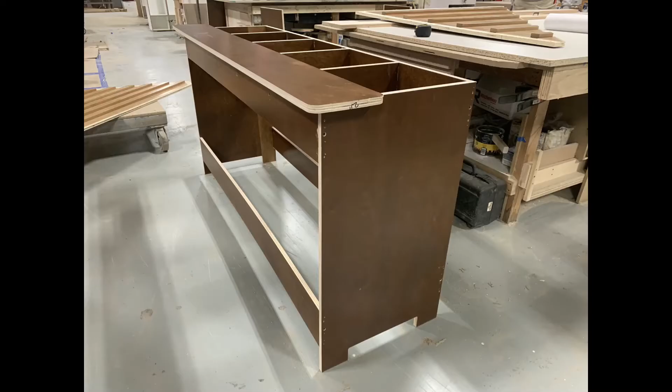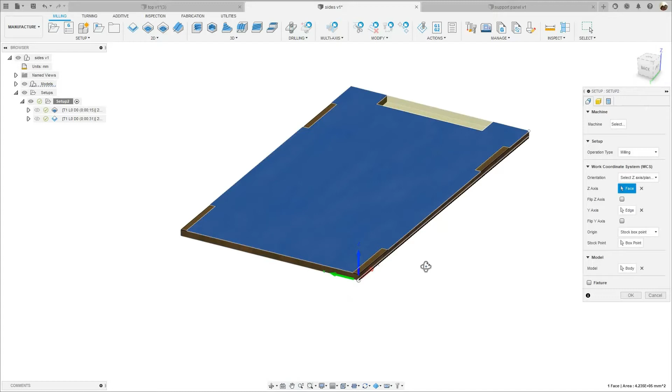Okay, I'm gonna start with the side panel part, which is the first one that I was machining that you saw in the beginning of the video. Okay, so I'm gonna show you my setup. I'm gonna right click, edit, and my WCS is gonna be right here in the back. If you have a different CNC machine, yours is going to be somewhere else, okay?

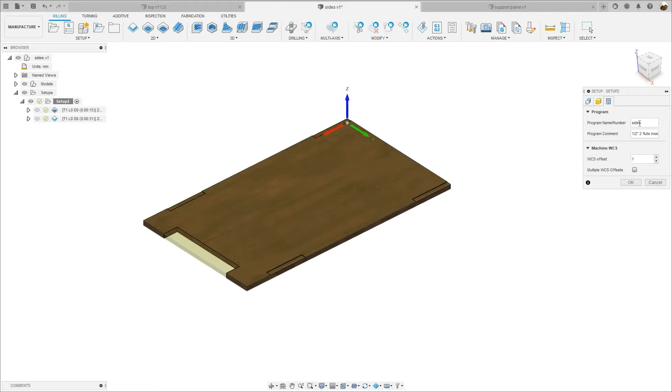And under stock, I didn't add any material. Under post-process, the program name is sides. Program comment, it says 1/2 inch 2-flute insert tool, okay? Now I'm going to click OK. And the first operation is the 2D pocket. I'm going to right click, edit, and I have the tool selected, which is a 1/2 inch 2-flute flat end mill.

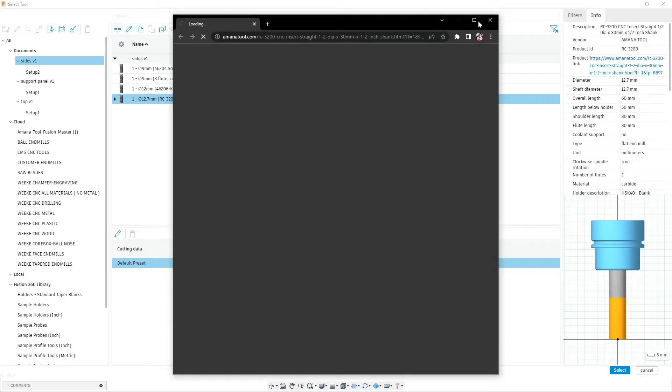I'm going to show you how it looks like. It's right here. I'm going to click on the link. It's going to take me to the Amana website. Okay. This guy right here. That's the tool. All right. I'm going to go back to Fusion 360. I'm going to click on cancel.

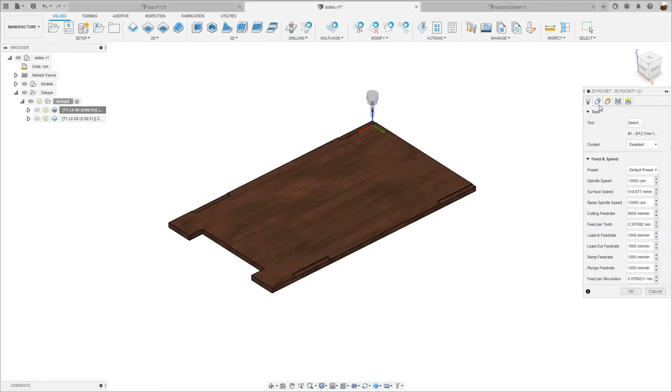And I have the feed and speed all set up. You have the spindle speed at 13,000 RPM, cutting feed rate 8 meters per minute. Okay. Under geometry, I got all 4 pockets or chains selected. All right. And my extension mode is set to tangent. All right. Under height tab, I didn't make any changes here.

The next tab is the passes tab, and I have preserve order checked, both ways checked, and maximum step over I have 10.7 millimeters. I have an expression here, so I'm gonna right click and go down to edit expression, and this is what I have. I have tool diameter minus 2 millimeters. Okay, and you can save that as a default. Okay, so right click, save as user default. Okay.

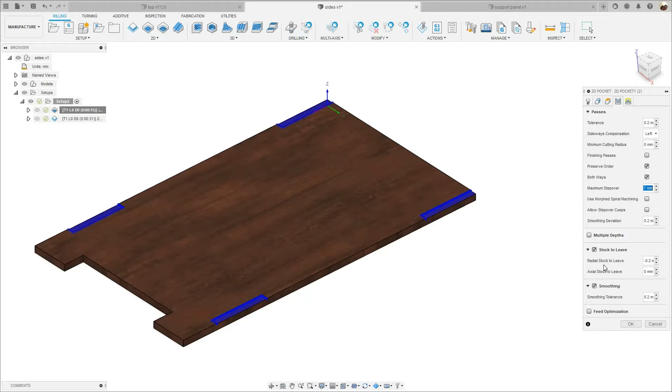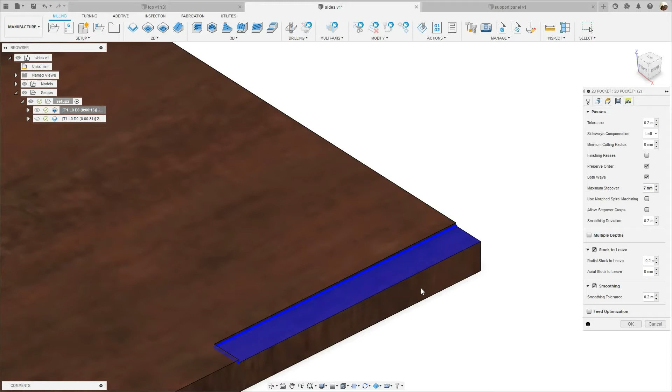Where it says stock to leave is checked, and I have right here where it says radial stock to leave is set to minus 0.2 millimeters, which means when you have a negative value, it's gonna remove more material. Okay, we're just making this pocket just a little wider, so when the guys put the support panel right here, it's flush with this edge right here. The face of the support panel is gonna be flush with this face of the side panel. Okay.

The next tab is the linking tab, and you can see my lead in, my lead out. Okay, horizontal lead-in radius is 2 millimeters. Linear lead-in distance is 25 millimeters. Okay, I got a vertical lead-in radius of 2 millimeters. All right, lead out is the same as the lead in, and the ramp type is plunge. Okay, I'm gonna click OK now,

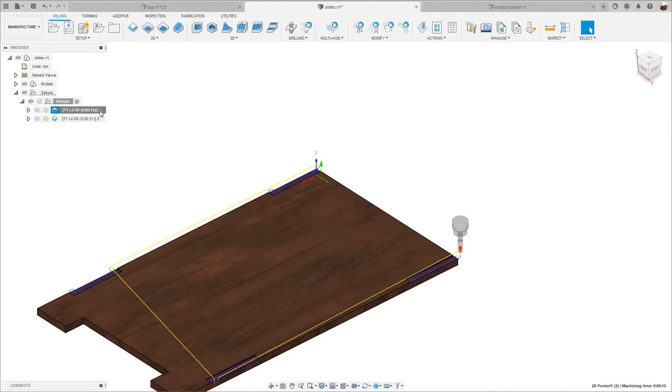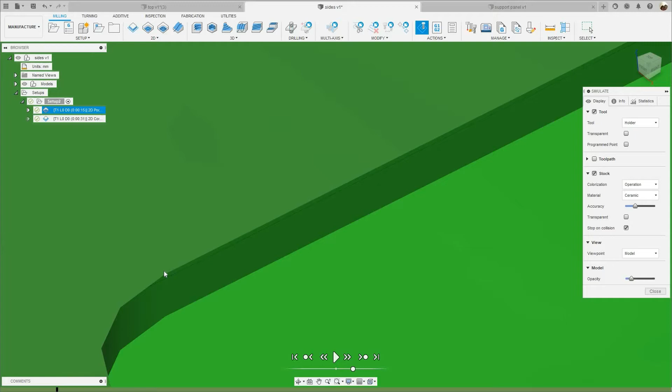and I'm gonna simulate this toolpath. Right click, simulate. See, I'm keeping the tool down. It's not retracting. And I'm gonna stop right there. I'm gonna zoom in. I'm gonna show you. See how it's removing the 0.2 millimeters of material. Okay. I'm gonna zoom in a little bit more. See it? Okay. So if you want to remove more material, you just gotta type a negative value. Okay.

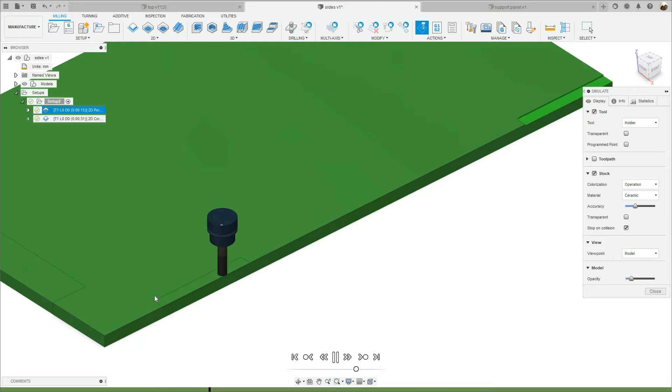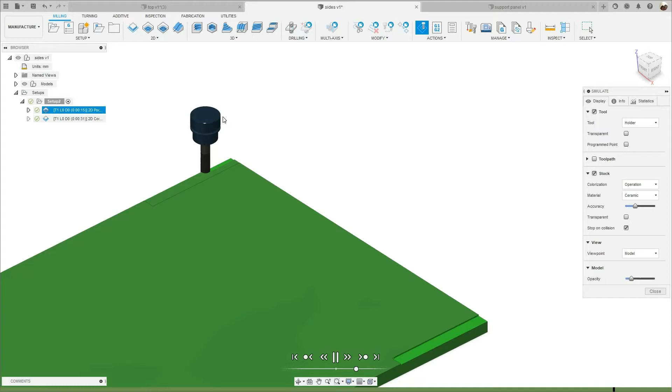It's come down here. It's gonna retract. It's gonna go to the other side of the panel and start machining this pocket. It's gonna retract and machine the last pocket. Okay. Okay, so that's the simulation of the 2D pocket.

And the last one is a 2D contour. Right click edit. And I'm using the same tool. I didn't want to use a different tool because the machine doesn't have a tool changer. But if your machine has a tool changer, you can use a different end mill if you want. Okay, it doesn't really matter. Okay, same feed rate, same speed as the 2D pocket.

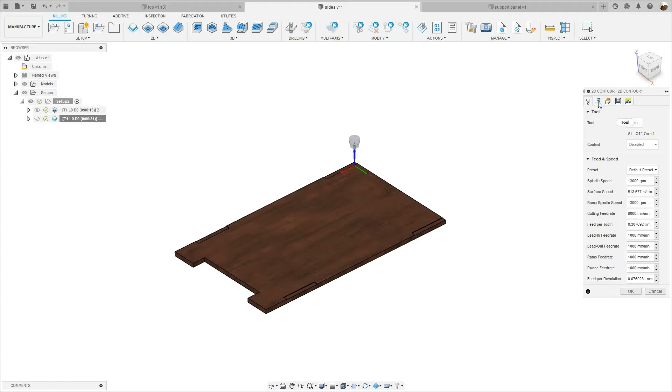Under geometry, this is what I have selected. Okay, under contour selection, I got 3 contours. All right, and side is set to start outside. Okay, under height tab, I'm gonna go down to where it says bottom height, and where it says offset, I have a negative value. That means the tool is gonna go lower. It's gonna go past the bottom face of the panel, 3 millimeters.

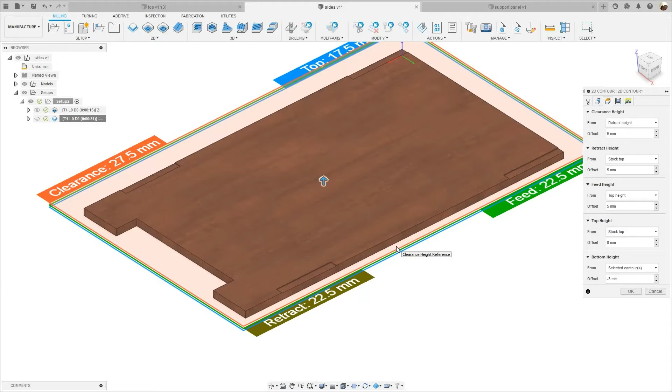Okay, that's what's gonna happen. You can increase this if you want. It depends. Let's say the panel is not really flat, and you don't have anything right here supporting this area. So this area right here is just going to be hanging.

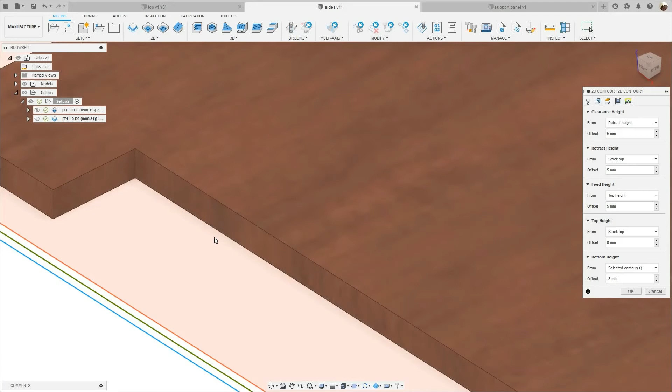So sometimes when you start cutting through the material, it doesn't cut all the way through. It leaves like an onion skin right here. So you got to increase the offset on the bottom height. Just increase it, okay? I usually use just -1 millimeter, but this time I had to increase it because my vacuum pads were somewhere over here, okay, right here. I didn't have any vacuum pads where the notch is because the vacuum pad is going to get cut, all right.

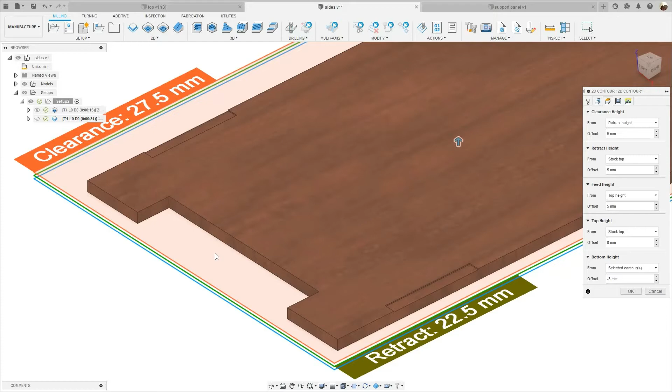On the passes tab, I'm going to go down to where it says multiple depths, and that's checked. And maximum step down is 5 millimeters, okay. The finishing step down is the same. Let's scroll down, and I have use even step downs checked, okay. The next tab is the linking tab, and I have a lead in and lead out of 25 millimeters right here where it says linear lead-in distance, okay.

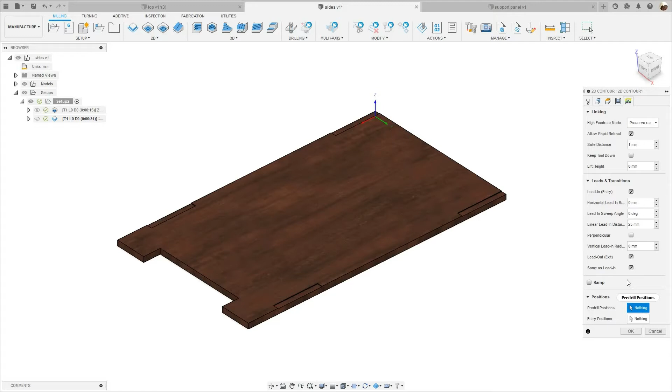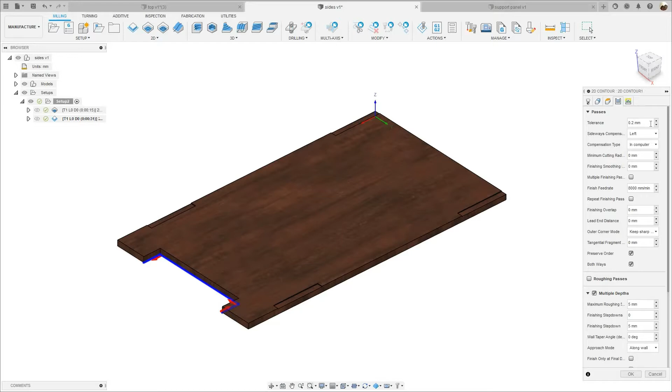And let me go back to passes. I want to show you something. See where it says both ways is checked. If you have this unchecked, the machine is gonna retract, and you're gonna have more routing macros in woodWOP. But if you have both ways checked, you're gonna have one macro. Okay. I'm gonna click OK. I'm gonna show you in the simulation.

So I'm gonna right click, simulate. I'm gonna zoom in, slow it down a bit. It's gonna exit, drop down and enter. See that? Which means the tool is down. It's not retracting. Okay.

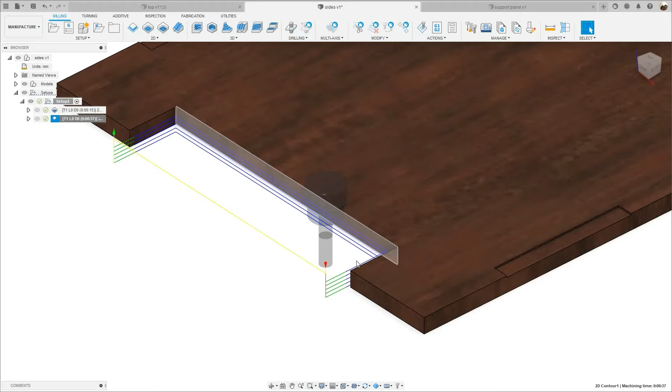Okay. And let me go back to the passes tab, and I'm gonna uncheck both ways. So under passes, I'm gonna uncheck both ways. I'm gonna click OK. Now you see the yellow line. That means it's gonna retract. So the machine is gonna enter right here. It's gonna drop down, go in, okay, and then come out. I'm sorry, retract, and then come to the start point and start machining.

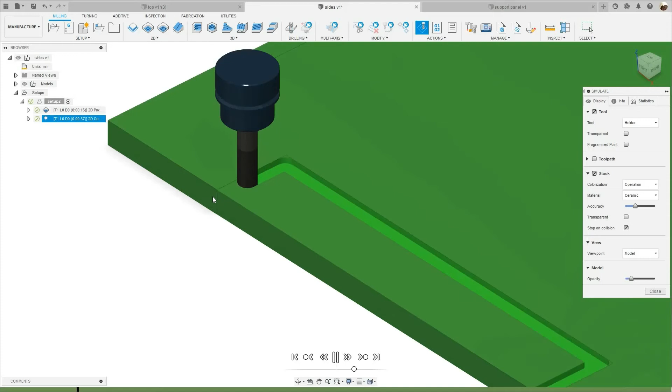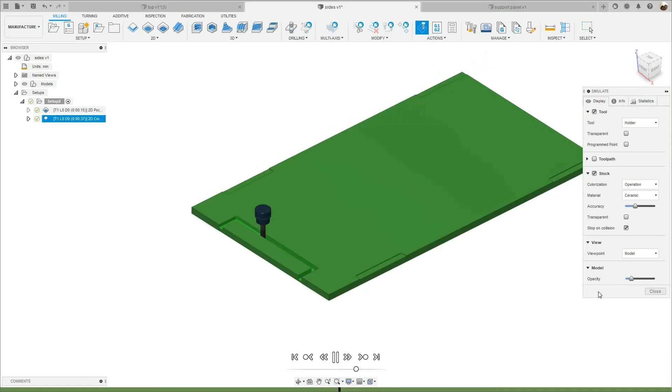So I'm gonna simulate this toolpath. Right click, simulate. I'm gonna slow it down a bit. It's gonna exit, retract, come to the start point right here. It's gonna drop down, go in, okay. It's gonna retract. Okay, so you get the idea, right? So I'm gonna close this simulation. I'm gonna go back to passes, and I'm gonna check both ways back on. I'm gonna click OK. Now you don't see that yellow line because it's not retracting. Okay.

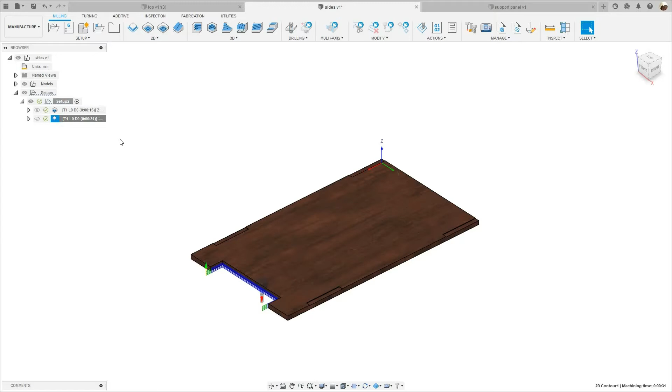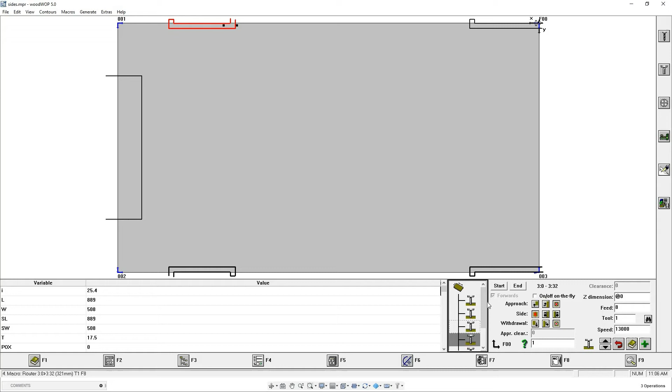So that's the program for the side panel. Okay, I'm gonna post process this program. I'm gonna right click, post process. I'm gonna post it. Yes, I want to overwrite it. I'm gonna go to woodWOP, look for that program. Okay, and there it is. You're gonna have 5 routing macros. 1, 2, 3, 4 pockets, and 5 is the last routing macro for the notch. Okay, so that's the first program.

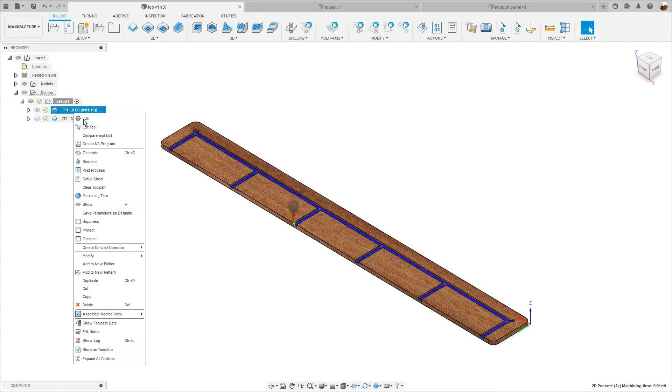Okay, let's go back to Fusion 360, and the next part is the top. Okay, right here, and setup is the same as the setup for the side panel. So I'm not gonna show you my setup. The first operation is gonna be a 2D pocket, same end mill, same feed rate, and the only difference is under passes. Let me see, geometry is just one chain.

Under passes, the maximum step over is gonna be the same. Preserve order is checked. I don't think that makes a difference if I uncheck it, but I'll just leave it how it is. I have both ways checked. The maximum step over is the same as the 2D pocket for the side panels. Multiple depths is set to 4 millimeters for the step down. Use even step downs is checked. And on the linking tab, I have a horizontal lead-in radius of 4 millimeters, and the vertical lead-in radius is 4 as well. And the ramp type is plunge. All right.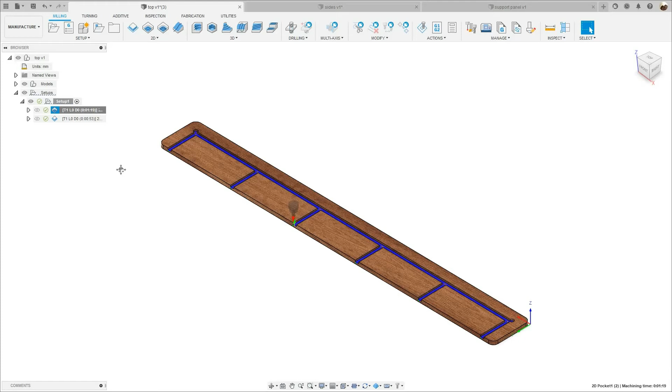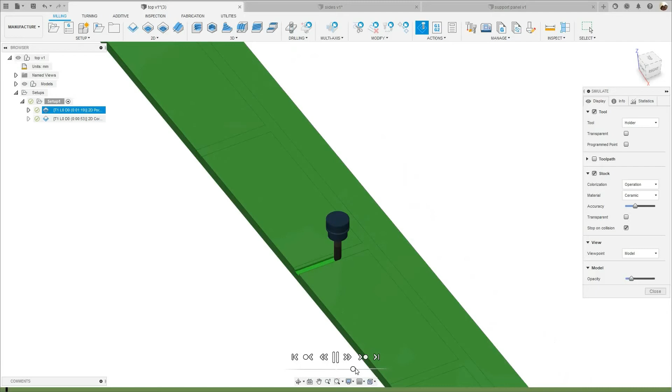I'm gonna click OK, and I'm gonna simulate this toolpath. Right click, simulate. So the machine is entering. It has like that radius, that 3 millimeter radius. Okay. See how the tool is down, it's not retracting. Okay.

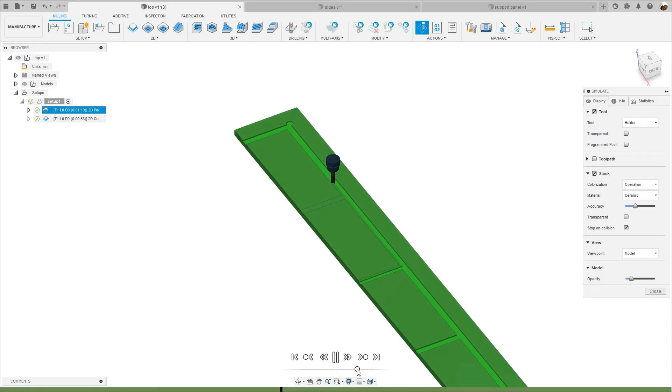Slow it down a bit. It's gonna come in, machine the rest of the material. See it drop down, machine to final depth. Okay. This is gonna be one macro in WoodWOP because I'm keeping the tool down. All right.

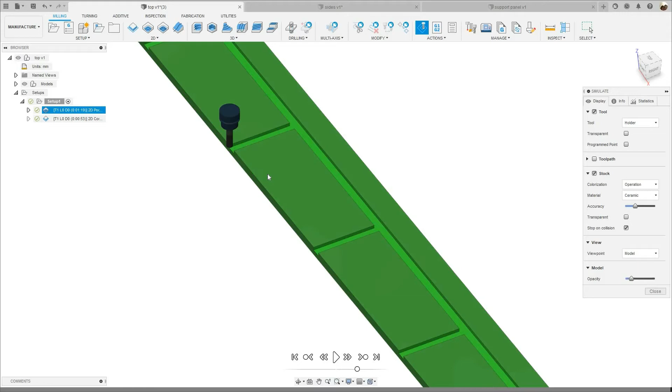And it's gonna exit right there. Okay. That's the 2D pocket. I'm gonna close it, and the last one is a 2D contour. Okay, same ML, same feed rate, same speed, and under geometry, I selected the round edges here. Okay,

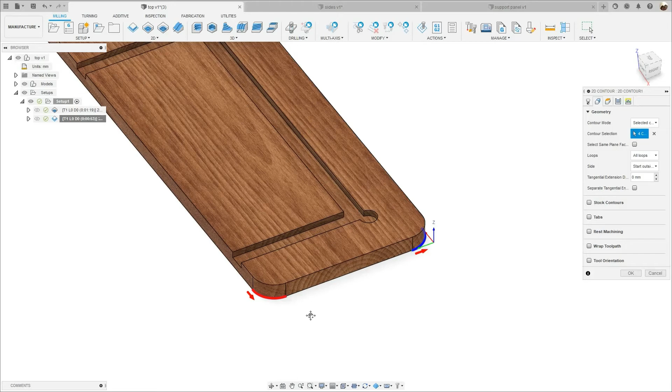zoom out, rotate the model. I'm going to show you this end of this panel. Okay, I'm going to show you how to select these contours. Okay, so I want to click on the X. If you're new to Fusion 360, let's say you want to select just the round edges, but you hover your mouse over it. You see it's trying to select the whole chain.

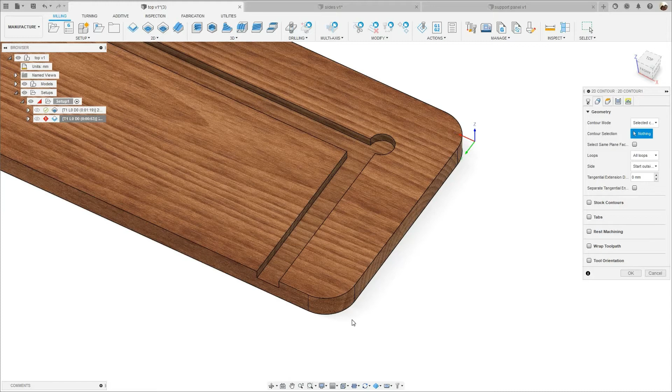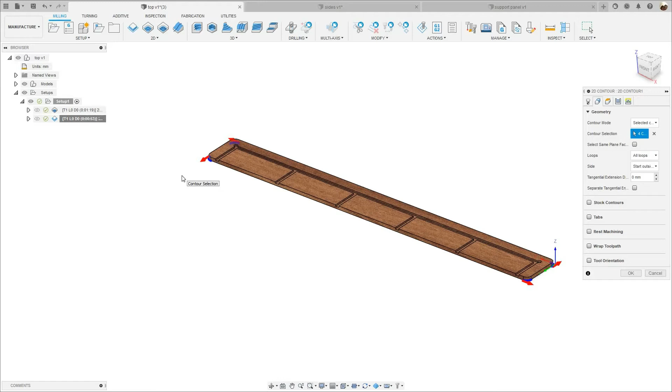Just hold down Alt on Windows. Just hold down Alt and select this edge. Zoom out. Keep holding down the Alt. Select that edge. This edge. Rotate the model and that edge. Okay. So you have to hold down Alt on Windows. I think it's Option on Mac. Okay, I'm not really sure.

All right, and under height, I have it where it says bottom height. The offset is -1 millimeter. Okay, so I'm cutting through the material. Under passes, I have reverse order checked. I have both ways checked. So the machine's gonna drop down, start machining, and then drop down, start machining. It's gonna go back and forth.

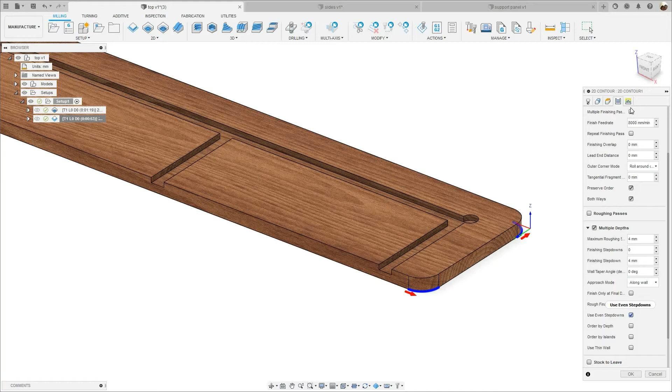Okay, and under multiple depths, I have a maximum roughing step down of 4 millimeters. All right. I have a rough final check. Okay. Order by islands checked. I'm gonna check this. I don't think it makes a difference. I'm gonna check use even step downs. Check that. Linking tab.

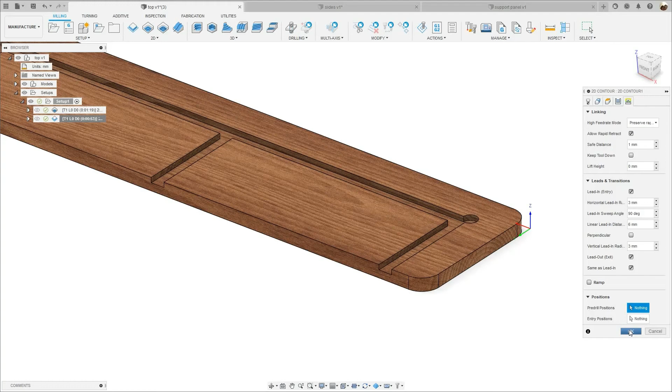I see the lead in and lead out. Okay. I have a horizontal lead-in radius of 3 millimeters. Have a linear lead-in distance of 6 millimeters. Okay, and the lead out is gonna be the same as the lead-in. So I'm gonna click OK, and I'm gonna simulate this toolpath. Right click, simulate. Slow it down. Slow it down a bit. So I'm gonna play it.

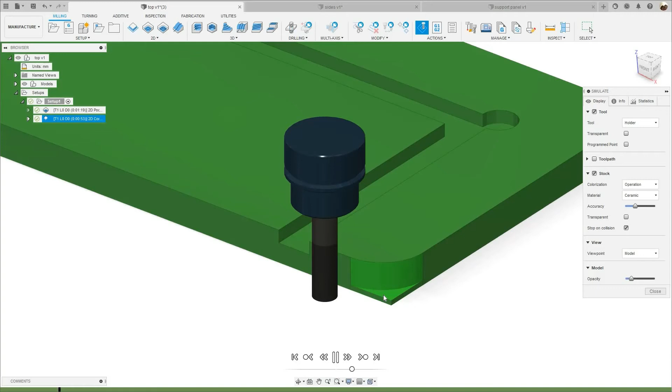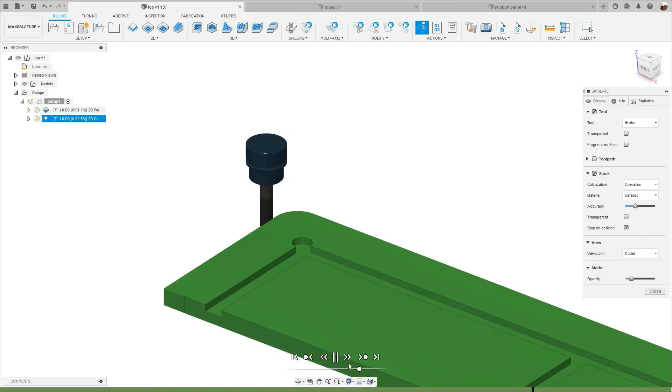It's gonna drop down. See that? It's not retracting. It's gonna exit, drop down, go in, come out, drop down. See that? That's it. It's gonna go to the next edge right here. Zoom out. I'm gonna zoom in. Okay. So I'm gonna have 5 routing macros in WoodWOP. Okay. I'm gonna post process this program, and I'm gonna open it up in WoodWOP.

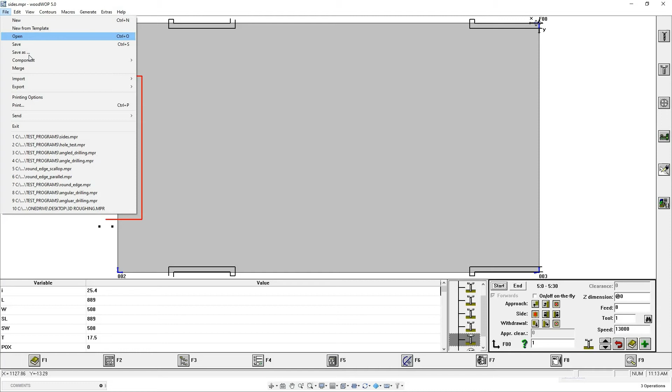Select the setup one. Right click. Post process. I'm gonna post it. I'll go to WoodWOP. File open. There's the top panel program. There's one macro, right, for the 2D pocket. The second macro, all right, the 2D contour. That's the third macro, okay. The fourth and the fifth. So I have 5 routing macros in WoodWOP, okay.

If you had both ways unchecked under passes, you're gonna have a lot of macros because it's gonna be retracting, all right. So just make sure you have both ways checked under passes, okay. When you're doing the 2D contour, when it comes down to like trimming, or like doing a notch or anything like that, like you're cutting through the material, okay.

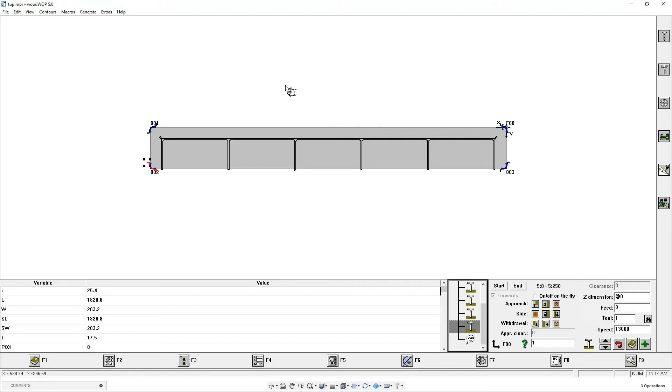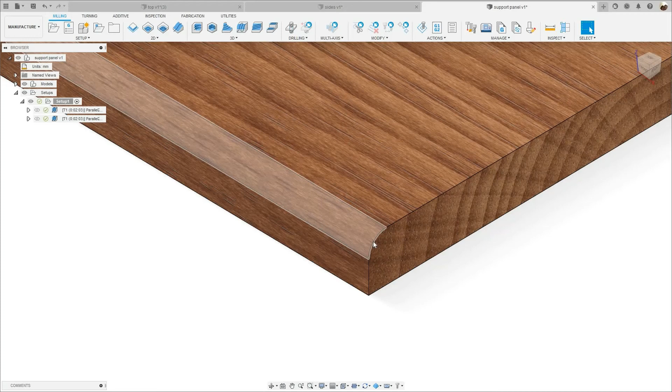Let's go back to Fusion 360, and let me show you the last program, which is the support panel. And this panel, let me see, you see the toolpath. If you don't see the toolpath, just go to the eye looking icon. Just turn that off and turn that off. Okay. I'm gonna zoom in. You see the round edge. It has a radius of a quarter of an inch. Okay.

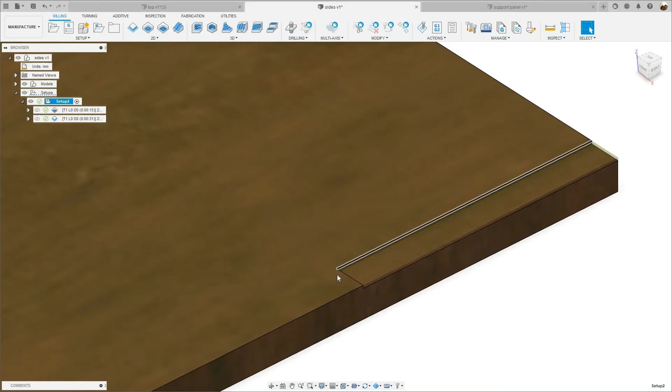Okay, because that's the same radius as the pockets right here. All right. It should be the same radius. It's the same tool. Okay, so the half-inch tool is gonna leave a quarter-inch radius here. So they didn't want to notch the edges of these panels. So they wanted to have a radius here. Okay.

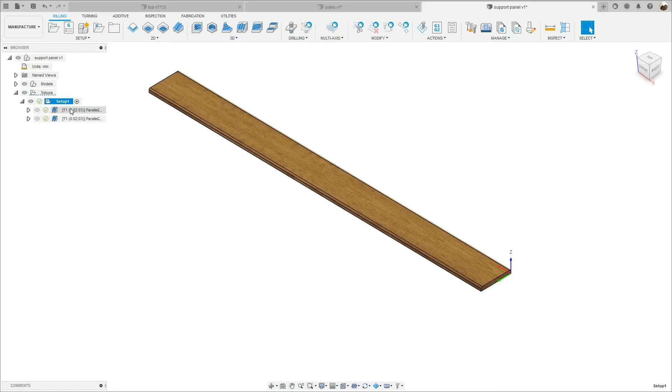Let me zoom out. And I'm not gonna show you the setup because it's the same as the other ones. So this case I use a 3D toolpath, which is a parallel toolpath. Let me go up under the 3D menu, which is right here. This guy, this is the one that I use. And I have a round over bit, so I use a ball end mill, half inch.

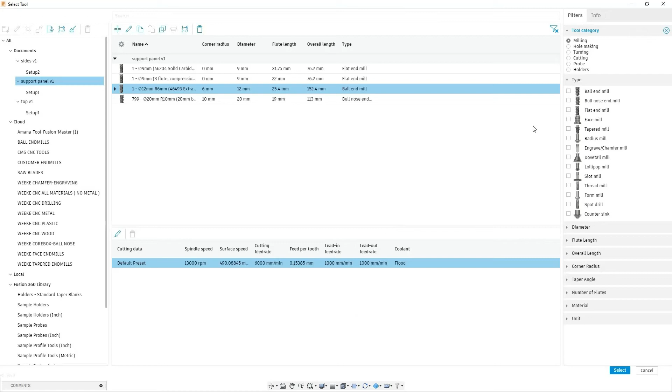I right click, edit, and I'm gonna show you that end mill. I'm gonna click on the link. It's gonna take me to the Amana website, and I was using this guy right here. Okay, let's go back to Fusion 360.

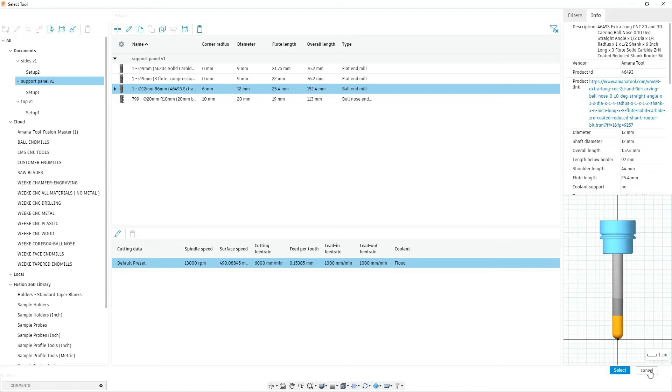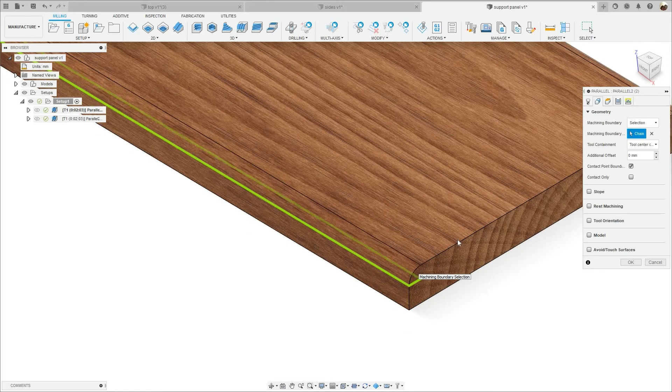I'm gonna hit cancel. Okay, so 3D parallel toolpath, and spindle speed was 13,000 RPM, cutting feed rate 6 meters per minute. Geometry, I selected this profile here, this round edge. I have contact point boundary check under height. I didn't make any changes here.

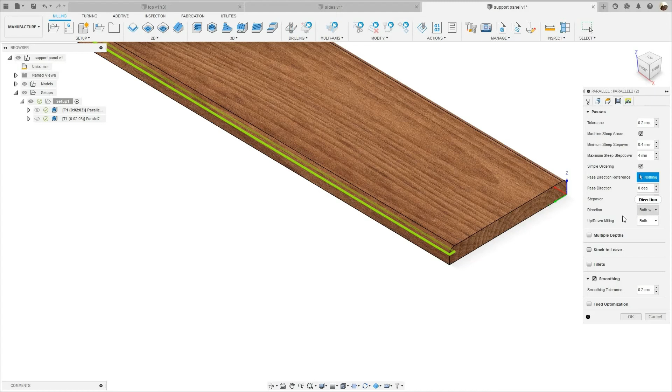Under the passes tab, I have where it says machine steep areas. I have that checked. Maximum steep step down is 4 millimeters, and I have simple ordering checked. And pass direction is set to 0. Step over is 4 millimeters, and direction is both ways, and up down milling is both.

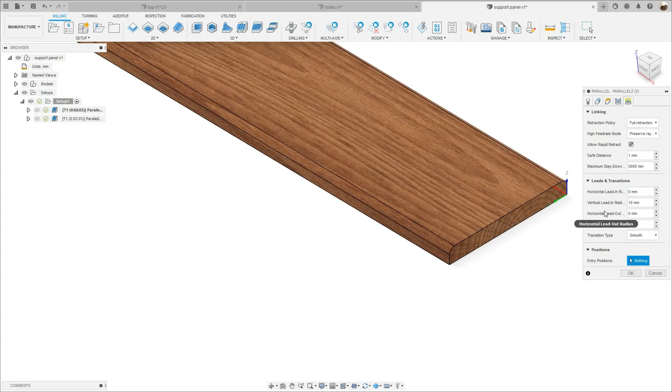On the linking tab, maximum stay down is 5,000 millimeters. I didn't want the machine to retract. I just wanted one macro for that parallel toolpath. And the lead-in radius is 10 millimeters. All right, so I'm gonna click OK. And I'm gonna right click simulate. I'm gonna zoom in. I'm gonna play.

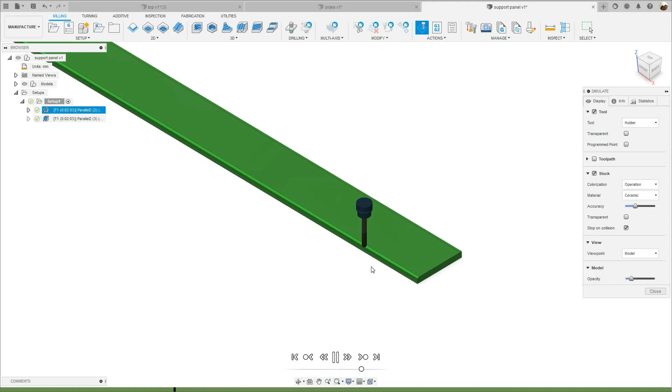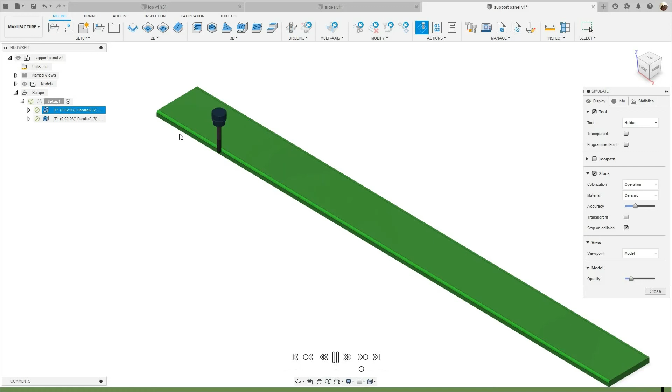Just creating that radius on this edge. So it's basically roughing and creating that radius. I know that ball end mills are not for roughing, but since the machine doesn't have a tool changer and I wasn't removing that much material, I just wanted to use that ball end mill.

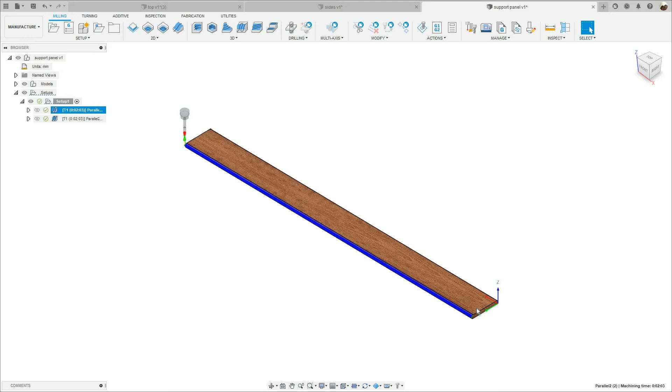I didn't want to use like a roughing end mill, a flat end mill, and then I would have to change to the ball end mill manually, because the machine doesn't have a tool changer. So I just wanted to use one end mill. Plus, this is wood, so it's not really metal or anything like that. And so that's the first one.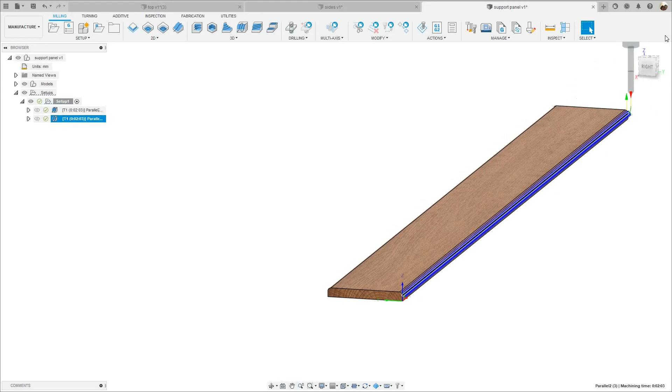The second one is on the other edge, and it's the same thing. I just copy and pasted it and selected this profile right here. I'm gonna rotate the model. I selected this profile right here. And that's it for this program. I'm going to post-process this program. Right-click, post-process. That's the name of the program. It says support beams. It's supposed to be support panel, but I'm not going to change it. That's fine. I'm going to post it.

And you see I was going to use a 1/2-inch insert flat end mill to rough out the material, and then I was going to use the 1/2-inch ball end mill to clean up that edge, create the round edge with the radius. But I was just using the 3-flute ball end mill, so I just deleted the rest of the comments. So the comment is going to be 3-flute ball end mill. That's all we're using.

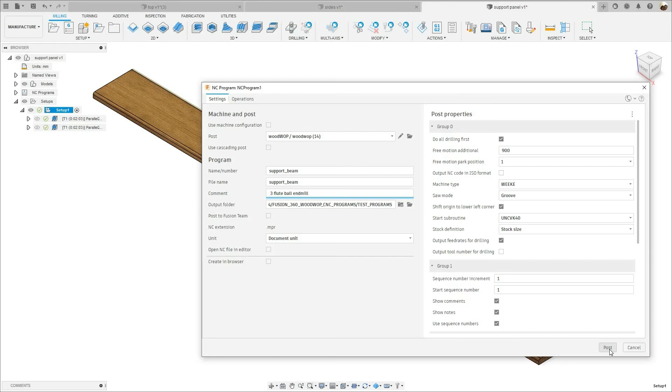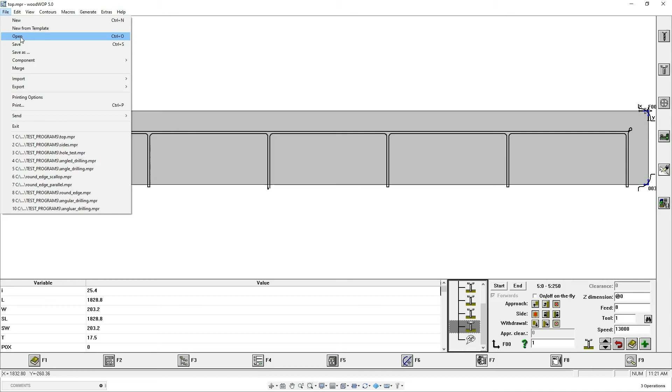So I'm going to post process the program. I want to go to woodWOP 5.0. I know it's old, but this is what we have in that machine. You guys might have new versions of woodWOP. That's great. Hopefully one day I'll get woodWOP 7. So I'm gonna look for that program and open it up in woodWOP, and there it is. So I got 2 routing macros.